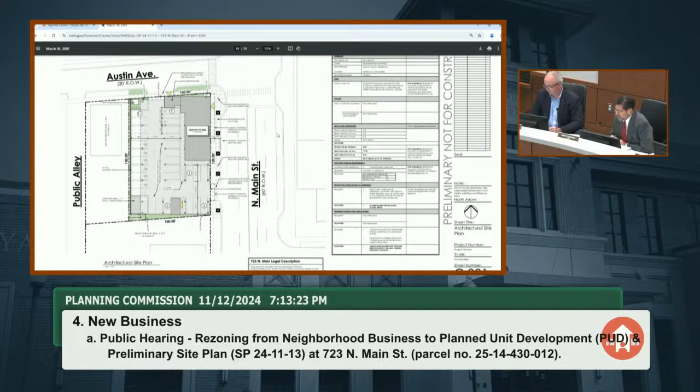Any other questions for Mr. Thwing? Okay, hearing none, I'm going to call the petitioner forward. I'm going to ask you to come forward with your team, introduce yourself, and tell us why you're entitled to the relief you're seeking.

Thank you, Mr. Chairman and Planning Commission members. I am Dennis Cowan, representing the applicant. With me this evening are Ralph and Mike Bianchi, who are the owners of the salon currently on site, and also will be the owners of the apartment building that is being proposed. Also with us is our architect of record, who will speak in a minute, Jason Krieger of Royal Oak-based Krieger-Klatt.

Let me begin by saying this is a good news story for the city of Royal Oak. We have a business that has outgrown and thrived at its current location and has deemed it necessary to move Bianchi Salon to the new Jonah building on the northeast corner of 11 Mile and Main. That is good because customers who live in and around Royal Oak will not be inconvenienced, because the location is just several blocks away. Employees who live in Royal Oak will be able to continue their employment without disruption.

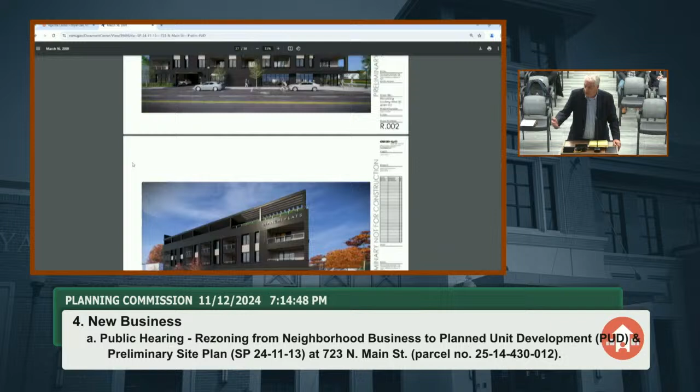And also, they are expanding. They're adding at that location the number of chairs, so to speak, and their square footage. So we see this as a win-win for Royal Oak, and certainly a community benefit to have a business that has grown up at this location and is thriving seek to move within this community, keep those jobs, keep that revenue here, and then redevelop the current site.

I might also add that the Bianchis have another business in Royal Oak. It's called Elevate, at the corner basically of Crooks and Normandy, a little bit away from Royal Oak High School. Elevate is a cosmetology school which trains persons in all aspects of hair and cosmetology, and that is a franchise with L'Oreal that they have, which has put hundreds of men and women through the cosmetology school to work not only at their salons, but other salons in the greater Metro Detroit area. So they are committed to Royal Oak and want to continue that commitment and that investment with this project.

So it is a 24-unit, 4-story project, which we consider to be modest compared to some other much taller nearby apartment buildings. I might add that right across the street, a little bit north at 808 North Main, there is a 24-unit, 4-story apartment building that has been there since 1940, according to the city records that I reviewed. And that has existed there without creating any difficulty in that neighborhood.

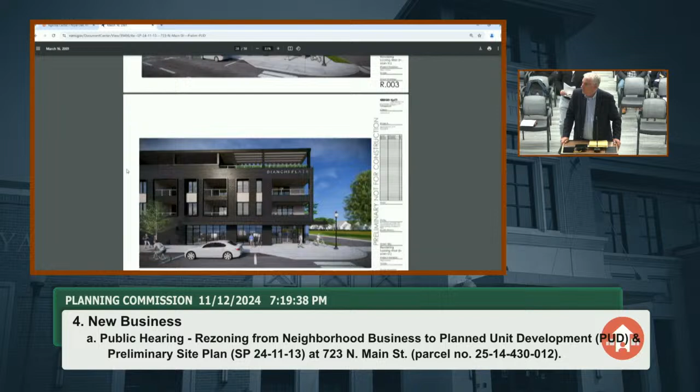So at this time, I'm going to ask Jason to come up and walk you through the site plan and the building, and some of the excellent features we have, not only for the community as a whole, but also for the tenants.

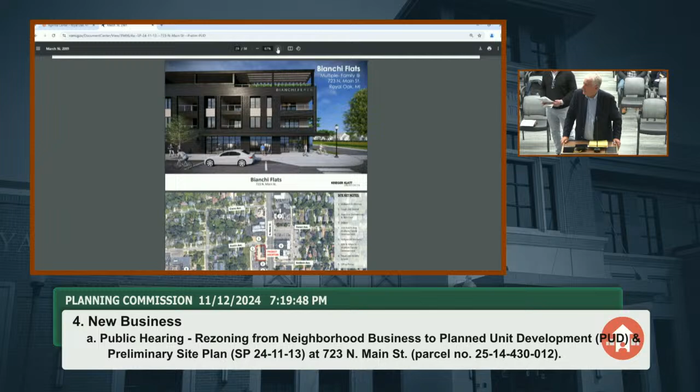I do want to mention one issue that came up. I think there was agreement at the neighborhood meeting that this change will actually improve the traffic and parking situation in the area. Bianchi Salon has thrived at this location, and on very busy days they have upwards of 200 customers and employees coming through that building, generating a lot of traffic on Main Street. I think this will improve the situation by having a much more serene apartment complex built on this location instead of a very busy and active business.

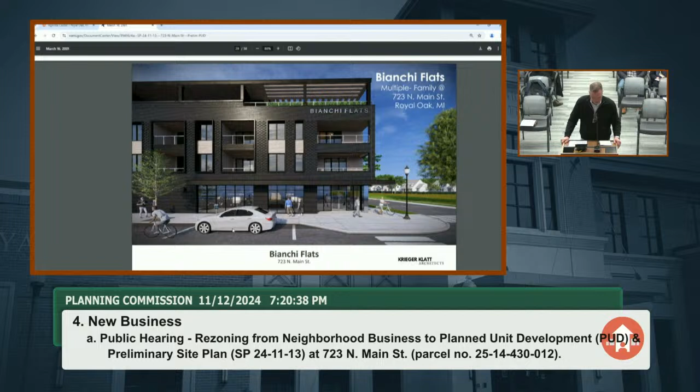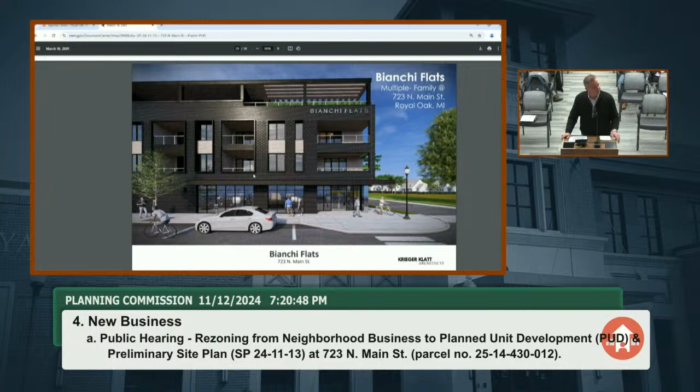Good evening. My name is Jason Krieger with Krieger-Klatt Architects, 400 East Lincoln, Royal Oak, Suite A. We prepared a brief presentation for everybody here to run through the building. Tim already did a great job giving you the overview, but I'll walk through the building, touch on a few items we maybe haven't addressed yet, and I've handed out a packet with some supplemental information.

These are items that came up, as Dennis mentioned, after the neighborhood meeting, so they were addressed after everything was submitted. We prepared documentation on sight lines from the parking lot leaving beneath the building, as well as screening for the neighbors to the west from folks living on floors 2, 3, and 4. So we'll just run through this.

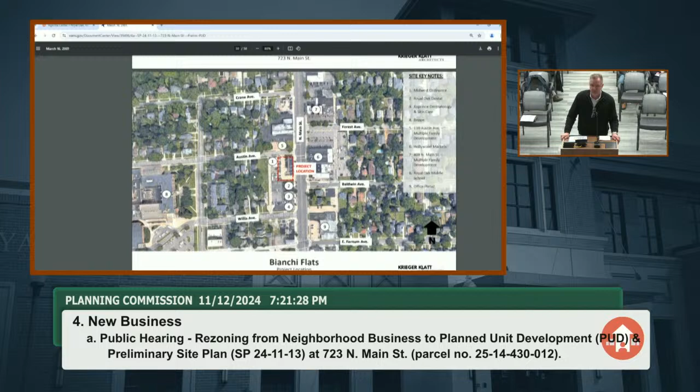So this is the location — corner of Austin and Main Street, which everybody knows. Next slide, we have some existing photos. One thing to point out: our ground floor building is almost the exact same size as Bianchi Salon, just a little bit bigger, but it's funny how similar it is.

There we go, existing — keep going, Tim. Thank you, okay, we can stop here. So this is the site plan. The ground floor of this building sits in the northeast corner of the site, and you would circulate around behind the building. You could come in or out off of Austin or Main Street. It's primarily parking on the ground floor. We have a refuse room on the ground floor facing Austin that's fully enclosed — the doors come up and the trash folks take it out at the moment they collect the trash. Otherwise it's totally enclosed, with a trash chute in the building.

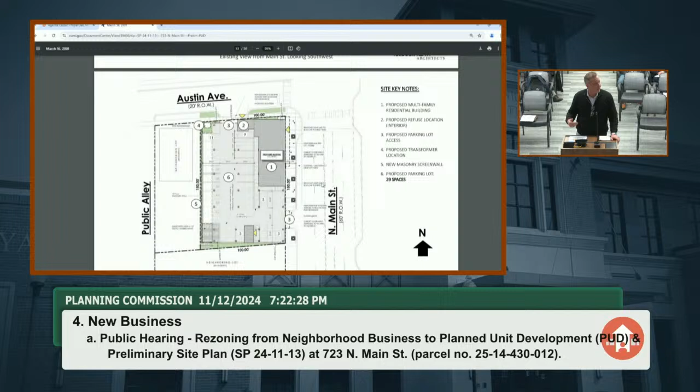The other items on the ground floor, which I'll show in the next slide, are mail, some small amenity space, and utilities — you can see that right there. One thing I'll point out, which is in the packet we'll walk through, is that we did carve the ground floor of the building back. I think we're off by the vision triangle by a foot, which we can adjust if the Planning Commission chooses to. The one thing in that vision triangle is a column, and you'll see that in a rendering in the packet.

The yellow areas are really services, stairwells, elevators, water riser rooms, things of that nature. The darker shaded area on the right side of the site, that's the building above. So on the ground floor, all the way on the west, there's daylight. You could see up to the sky.

Just to the west of us is the commercial property Ordnance. I forgot what that place is called, but I think it's a weapons shop. Ordnance. Yeah, okay. So let's go to the next slide.

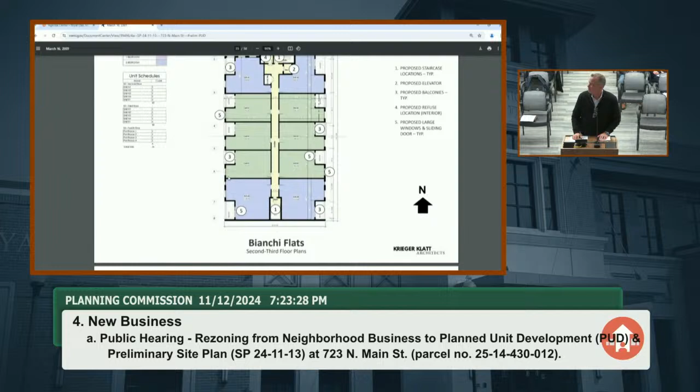So this is floor 2 and 3. It's a double loaded corridor. The green boxes represent 1-bedroom units, and then the corners, the purple, are 2-bedroom units. And then we have the central corridor with the elevator and stairs at the top and stairs on the bottom.

One thing to point out, which is beneficial to the project and also the neighbors to the west, is that all of the balconies are recessed. So they're not sticking out like what you see on Icon or Billings Place. That makes any kind of views out to the neighbors much more difficult. In other words, they're more screened.

Next slide please. This is the top floor, so we have 4 penthouse units. Really, it's just larger 2-bedroom units. We have upstairs amenity space. It's not fully programmed yet, but you can see that their balconies are recessed and larger. And then we have a rooftop deck for the amenity space, on the northeast side of the building, just for folks to enjoy.

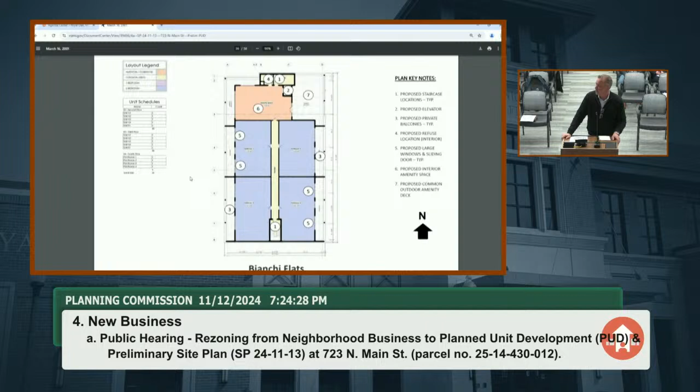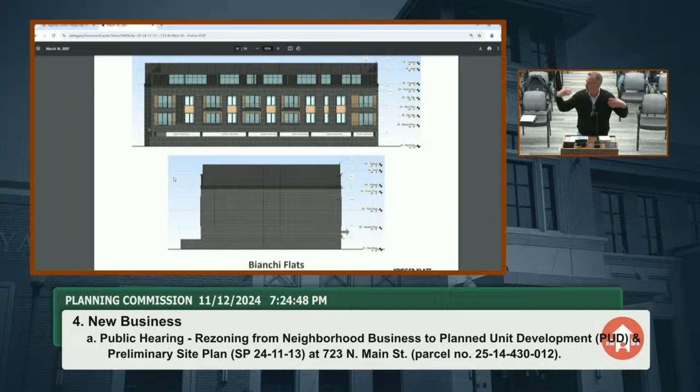Next slide please. So the next couple slides are the elevations. It's pretty much an all brick building, which is great. The Bianchis said they want something that's going to be pretty much maintenance free because they're long-term holders of their properties. So it's going to be brick. The beige you see in there would be like a faux wood material. And then the very top floor, just at the penthouse, it's going to be a mixture of pre-finished brake metal and those James Hardie panels.

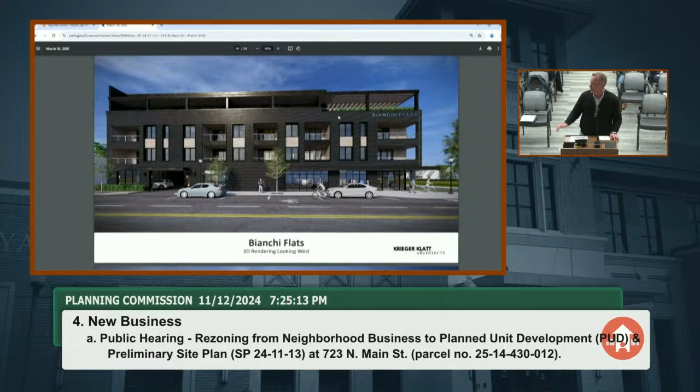Next slide please, we have some renderings I can show that better. So here's some images from the street. On the ground floor on the right, that's all the amenity space. You can see the spot where you drive in on the left. And on the very upper right portion, that's the outdoor amenity space for the tenants. And then all on the top, those are all balconies for the penthouse units.

And here's just some aerial shots showing it sit on the site. Okay, you pop these in. Okay, so let's go back. These are in this packet, but let's go back to this packet right here really quick.

So the yellow triangles that we're showing are the 10 by 10 vision triangles. If I start on the northwest, along Austin, that seems like it meets the vision triangle on the left, but on the right is where we would actually be impeding on that vision triangle. We've done that on other projects like Billings Place, and we can name a few. What we would do there is provide a vision mirror or something so folks could see anybody heading due west on the sidewalk. So we've been through that before and we've solved it.

If I go over to the corner of Austin and Main Street, we have a rendering here you could see, but it's open. The only thing you're gonna see is a column. So we think that actually meets the intent of the vision triangle. And if you go south along Main Street, the same thing.

As you're driving towards the west in a vehicle, to the left and right, those are all windows, so you can see people who are coming down the street. There is a bit of wall, and you'll see in the renderings here, but you still see people coming down the street. So the next page is what Tim just had up there, and that yellow line is going from a car looking out. What we're showing there is that we're actually improving that condition compared to how it exists today. In other words, you have more safety.

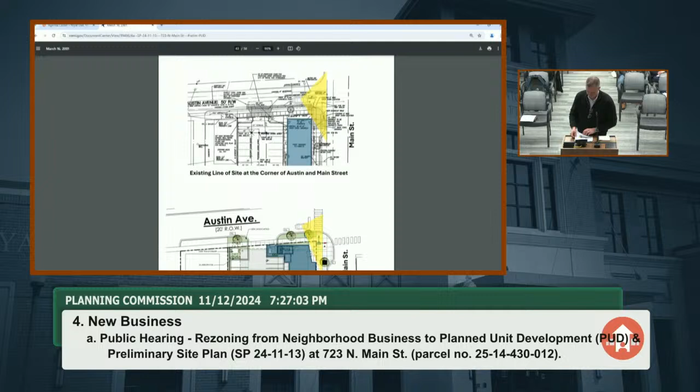Next slide please. Or is that it for those? Okay, so then we have a photo of the current conditions today compared to a rendering in basically the same spot, so you can see that it's more open.

Going back to your packet, that's where we have some views from the parking lot looking out. We're showing going north out to Austin, going east out to Main Street, and then we have some renderings. You could see the actual photo of what's there this morning. I went out there and compared it to a rendering, so you can see people walking by. And then the same thing heading north out to Austin. You have that comparison for you guys.

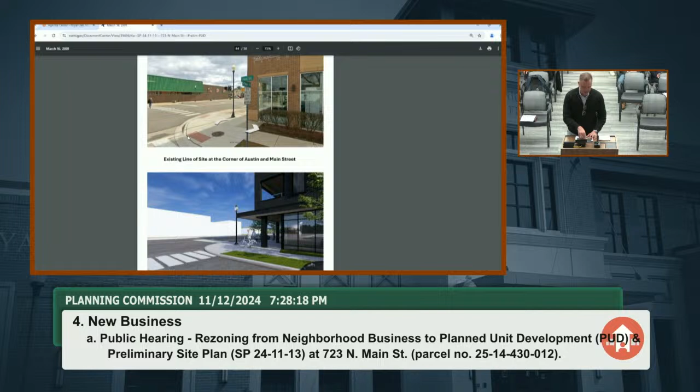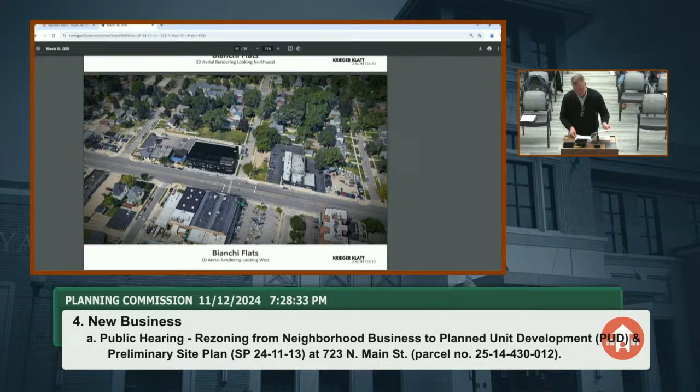Finally, we're going to address the balconies. So we put the upper floor plan over top of the aerial, and that gives you a sense of where the residences are compared to this building. If you go straight due west, you have the commercial property, an alleyway, and then an empty lot. Currently, it's an empty lot. If you go straight north, that's where the condos are being built, and there's some homes to the west of that. And if you go southwest, that's where the single-family residents are currently. So our proposal, after meeting with the residents, highlighted in yellow, would be to build an actual half wall there. We had an open railing before. The half wall would be about 4 feet tall, and then you're set back about 8 feet into the unit, so you're pretty well tucked in there. We're discouraging folks from looking over onto the neighbors.

And that's my presentation.

Are there questions for the architect? Yeah, just one quick question.

When I'm looking at the proposed layout of the building, is there any reason you didn't center it on Main Street between the two side streets, so the visibility triangle issue just goes away, as opposed to building it right to the corner of Austin and Main?

Oh, I mean, literally slide it to the west? Literally slide it to the south. So it's literally halfway between Austin and Crane, I believe, is the street to the south. And then you've got whatever X amount of feet on both the north and south side of the building.

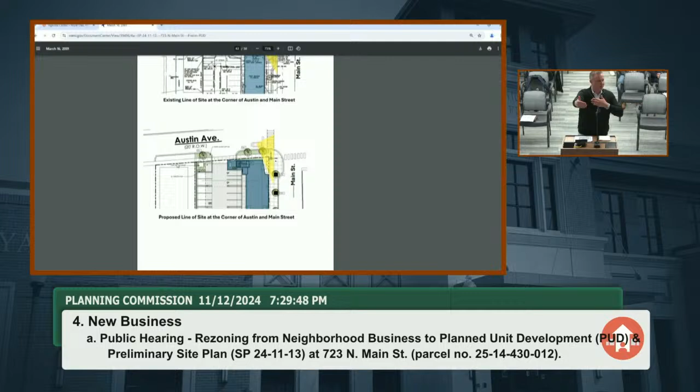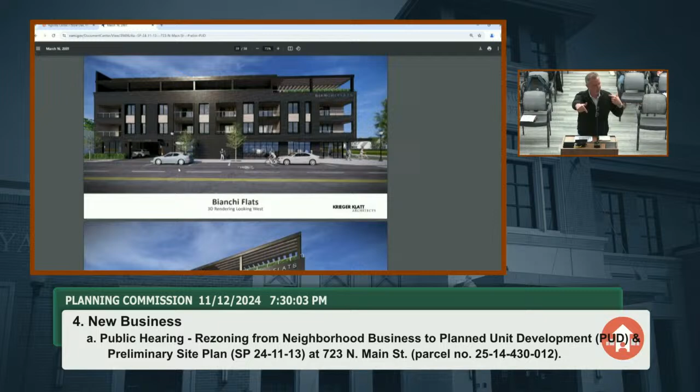So right now, it starts with the upper floors and getting the number of units we were looking to get. Then we line up our vertical circulation, elevators and stairs. When the elevator and stairwell was on the end, which is the safest way for an apartment building, to be on the extreme ends for egress, that's where it started to put the amenity space. Also, we had to park the site as best we could. So the parking worked best, most efficient, hugging the south and the west. The building also slid further towards Main Street for two reasons. One, to keep it as far away from the residents as possible. Two, for fire ratings—you want to stay at least 10 to 15 feet off the property line. I can't remember what the dimension was, but that's why it pushed towards Main. So those are some of the things that went into the layout.

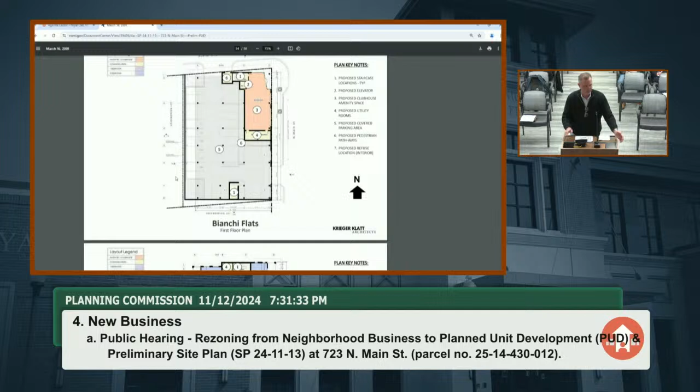The one sight line that still concerns me, and you spoke of it, and I'm still not happy about it, is the northbound out of the parking lot onto Austin. You can see cars and people coming from the left, but you can't see anybody coming from the right. Do you have any—I'll be asking for some sort of warning bell, alarm, et cetera. Absolutely, yeah, that's exactly what we did—maybe you remember Billings Place, we did that. They have that at Main North Lofts, they have that at Sky Lofts. We would absolutely implement some safety features there.

You mentioned Billings Place because we had, at some point in the past couple years, the City Commission or this Planning Commission had people who had near misses at Billings Place because the warning systems hadn't been installed or weren't working. I think it's vital there that we make sure that we've got an alarm system for people coming from the east. Okay, thank you. Yeah, absolutely.

All right, I've got a whole host of questions here, primarily centered on the community benefits listed for the project. The first question relates to the note about a 5% increase in insulation value across the building. What is the building construction type, how are you achieving this, and have you done an energy model to help validate the increase in insulation?

Going backwards, no energy model has been done yet. The construction type is a steel podium for the ground floor, with wood framing above. That's a goal we're going to go for, and it would have to be achieved with insulation and other means.

On the chargers, I'm assuming those are all level 2 chargers. Are those going to be exclusively for resident use, or are they available for the public? I believe they're all resident use, some local ownership. Yes.

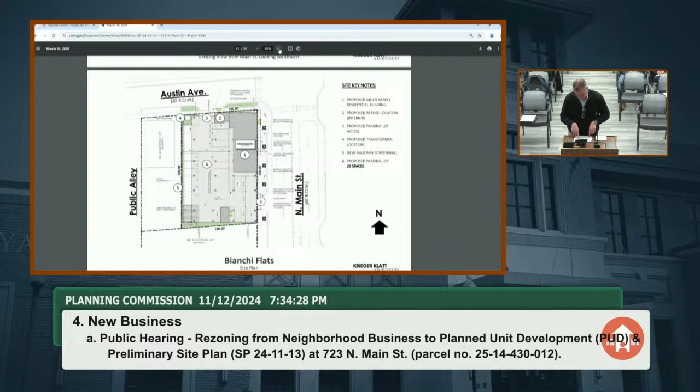Bicycle facilities—you mentioned bike racks, but I didn't see it on the plan. Can you speak to where it's located? We were looking to locate them in the southwest corner, but it never made it onto this set of drawings. But it is planned for the project—absolutely, they're going to have to put bike racks in, tenants are going to demand it. Is it bike racks or bike lockers? Bike racks.

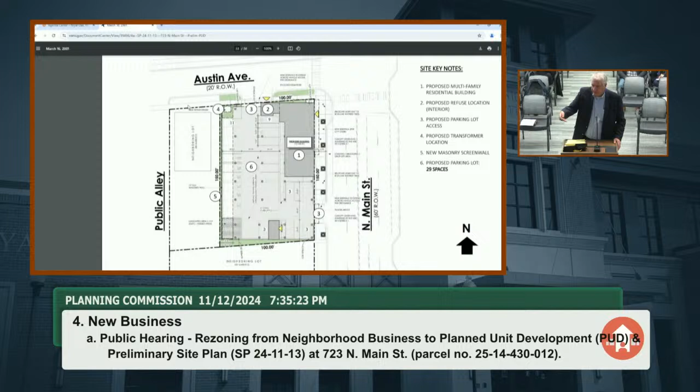Could you expand a little on the statement about using Royal Oak businesses and residents for design, development, and construction? Obviously the team in place is Royal Oak based, and it is the intent—though we're a ways from determining all the vendors—to use as many Royal Oak businesses as they can, such as Bianchi Salon. So that would be the goal, but we're pretty far removed from determining the exact people who will work on the project until we get approval. It makes the most sense because they travel less, and hopefully crews will be available.

Last two questions, with respect to green space: the percentage calculated—I want to make sure I'm understanding the drawings correctly. Essentially everything on the drawings that's green on the landscape plan is part of that calculation, is that correct? Yes. I noticed part of an area was specified as gravel, but everything green is all part of that calculation.

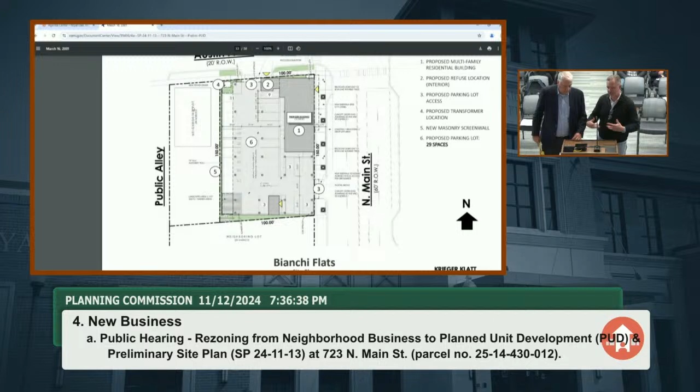Correct. The last question is on the refuse room. I understand there's a trash chute for the building—is it large enough, and designed to accommodate recycling for all residents in that refuse room? Recycling is typically taken down separately; that would just be for the trash chute. It would be a 30-inch diameter, large enough to handle bigger items, but usually in one of the upper storage rooms there'll be recycling bins that ownership would take out.

Okay, so there is a provision for recycling. Yes, absolutely, in the refuse room. Okay, that's all I got for now.

Okay, good, thank you. I got a couple questions. Don't go away. I just want to clarify, following up on what Commissioner Esprey was asking. Looking at what you gave us here, does the building go all the way down to the southern border of the property line? There's a triangle piece there, but the building goes to the property line on the south end, does it not? That's correct, yes.

Second thing, I want to know, if I am counting this correctly, everything in the site floor plan that's blue is 2 bedrooms, and the ones that are green are 1 bedroom? No, the ones that are green in the middle, those are 1 beds, and on the corners, those are 2 beds. Okay, and the second and third floor are the same? Yep, that's correct. Fourth are the penthouse units.

Okay, so I'm counting 8 2-bedroom units on the second and third floor, 4 on the fourth floor, 6 1-bedroom on the second floor, and 6 1-bedroom on the third floor, right? I believe so, yeah. Okay, if I count right, that's 36 bedrooms. I just want to make sure I'm clear for the record, there are 36 bedrooms on this site. Correct. Okay, thanks.

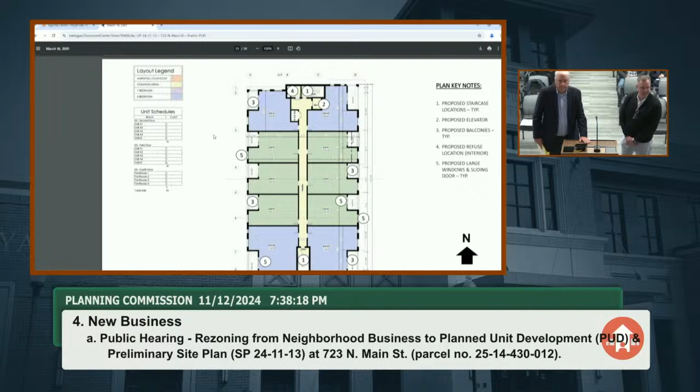All right, any other questions for the petitioner? At the moment, none. Okay, there'll probably be more. Have a seat, and I think we're ready to open the public comment on this item. Anything from staff before we start? No.

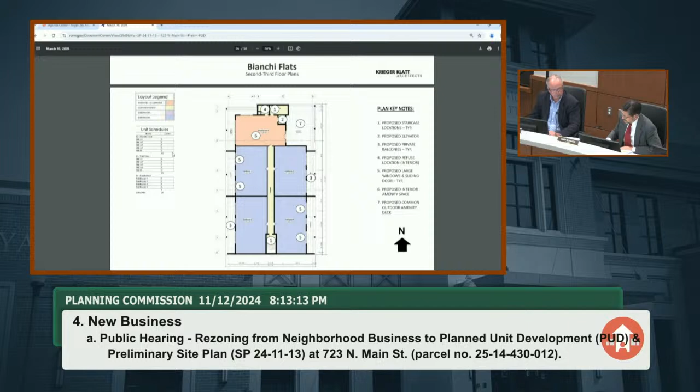I have another question here, but I'm just going to pause and send it to my colleagues.

So I guess this question will be for Mr. Thwing. If I look at the five listed deviations from the neighborhood business zoning, I'm just trying to understand in my own head. Obviously it was the applicant's choice to go the route of a PUD versus propose a project with the underlying existing neighborhood business zoning. If they chose to go with the underlying neighborhood business zoning, the five deviations listed would still essentially be deviations under that zoning, correct?

And I think we've resolved the triangle setback, yes, it would just be a different approach. Rather than a planned unit development, they could come here for site plan review, and they would be listed as variances for the zoning board of appeals. We would have essentially much less leeway as a body to correct through in terms of our lens to look at.

Okay, all right, that answers my question. Mr. Ellison.

I've been up here a lot of years, and we've discussed a lot of high-rise residential areas. We always have a discussion about the balconies, and there's no clear answer. But there's one observation people forget: we live in Michigan, not Florida. These balconies are not going to be used in the winter. They'll be used in the summer, three to four months if we're lucky. It's the same with being out in your backyard, sitting around your table, or your kids playing. Outdoor activities in these neighborhoods are limited by the weather, and that's a fact. But we're assuming these balconies are going to be a problem 365 days a year, and it never turns out that way.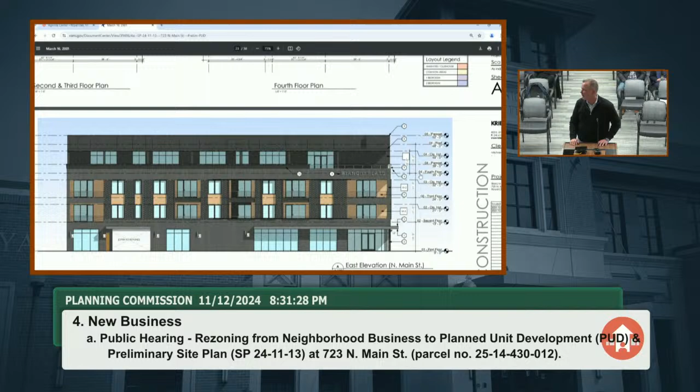Commissioner Douglas: So this goes to the city commission, right? I would like to move that the planning commission recommend this proposal to the city commission with the contingencies as listed, adding the requirement that there be traffic arms at the entrances to the parking area, and that there be a warning light flashing on the Austin exit.

Okay, traffic arms on both entrance exits, flashing light on the Austin side. And maybe something else if... No, I was just going to ask you, are you proposing this as a final plan? I'm going to say final plan.

Okay, the motion is to recommend approval of the PUD with the listed contingencies provided by the department, and the added contingencies that a traffic arm be installed at both entrance exits and a flashing warning light on the Austin entrance exit. Is that correct? Yes. Is there a second? There is a second.

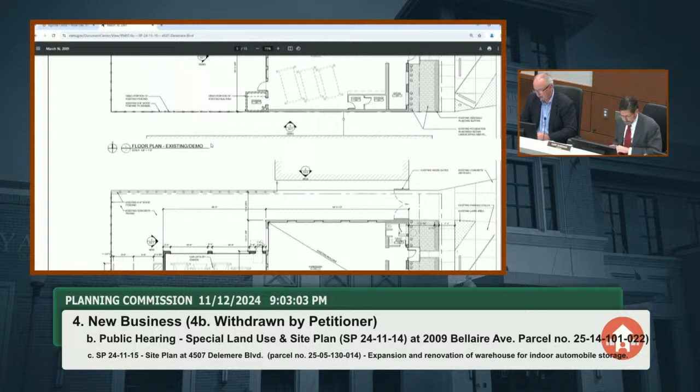The conditions staff is recommending as part of the site plan approval regard a potential variance from the Zoning Board of Appeals for the existing driveway width adjacent to the building, which is currently under the minimum standard for two-way movement of 20 feet. It's almost 13 feet in width going out to Delemere, adjacent to the existing building. The addition is set back further, some 26, 27 feet. It's fine.

Second, all waste and recycling would be contained within the building except when it's picked up. There is existing landscaping along Delemere. If that's sufficient for the Planning Commission, it's simply accepting it as presented, and then all the other conditions are standard city conditions on site plans in terms of paving, lighting, signage, and posting bonds with the building department for the addition.

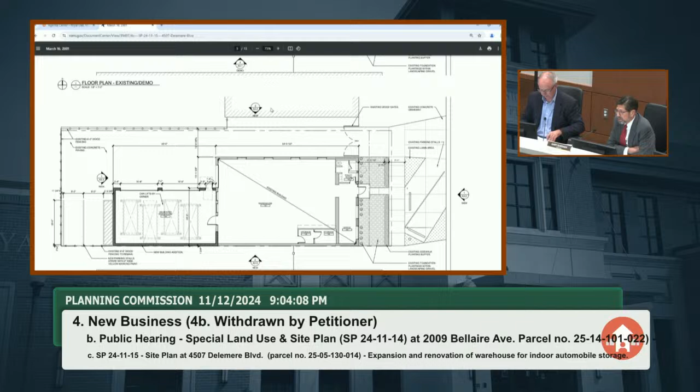All right, are there any questions from Mr. Twing before we call the petitioner forward? Seeing none, I would ask the petitioner to come forward, introduce your team, and tell us why you're entitled to the relief you're seeking.

Good evening, I'm Danielle Cataray of Cataray Architecture, resident and operating out of Royal Oak. My client, Paul Chakurian, is the property owner. He also runs the Collier's office, so we moved our office here a year and a half ago in the Howard & Howard building, 400 West 4th Street. We have about 20,000 square feet there, which we love. Fabulous, property owner and working here. Yeah, and former resident.

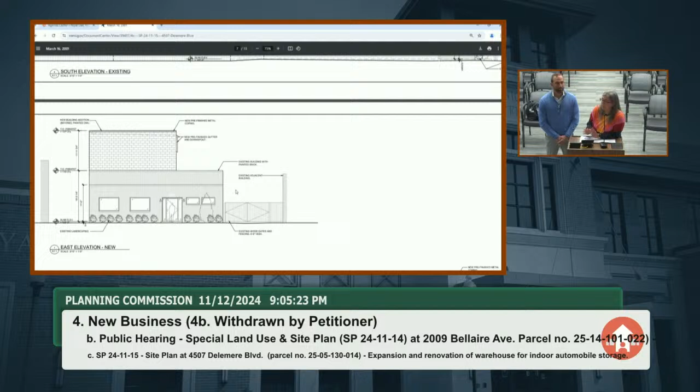Paul is a car collector, and I want to specify that because these are collectible cars that are meant to be inside, and that's the whole point of this addition, to store them inside a garage. I say that because I know some might be concerned about the property turning into some kind of car lot. That's not the intention at all. There's also no servicing of vehicles here. The place is immaculate, very clean, everything's internalized, it's private. That's really the extent of it. It's a garage addition so he can store more of his collectible cars.

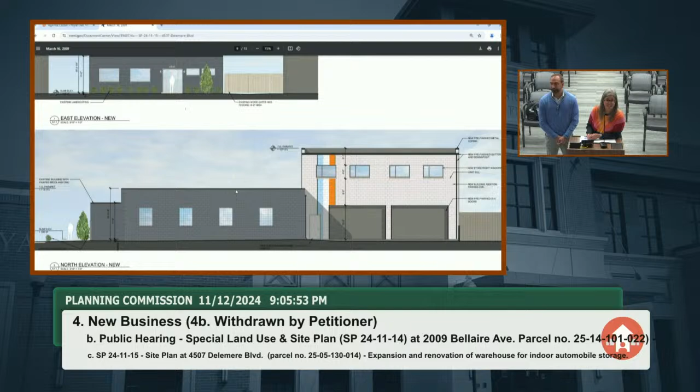I don't know who's first. Mr. Ellison, you're showing some car lifts. Are those floor mounted? They're not posted in the ground, they're floor mounted. They're just 4-post, but not drilled into the ground. You're not going into the ground? No. Okay, that's all I need to know.

Is the use of the building for your personal collection, or are you planning on making it available to others to rent out spots? Just mine, that sort of thing.

I got a quick question. You said you weren't going into the ground. So I did go there, I probably trespassed, I walked back and looked. The concrete back there is not in great shape. Are you going to dig new foundations for this, or how are you going to do this if you're not going into the ground?

No, I think that's a different question. The hoists that you store cars on, you store them stacked up. That's inside, and those are not drilled through the ground, they're just laying flat on some sort of platform, the feet. The back of the building where the new addition will go will have footings and a new floor. Okay, all right, I was definitely a little confused by the comment there.

By the way, yes, it looks immaculate from the outside. All right, other questions for the petitioner? All right, you can have a seat.

Okay, and if we can bring it back to the side, normally, just for the record, we've been in the practice of saying if anybody wants to speak from the public on a site plan, even though it's not a public hearing, we let them do it, but there's nobody here except the guy who recused himself. So we're not going to allow it. So we'll just bring it back to the side table, no public hearing, and discuss a potential motion.